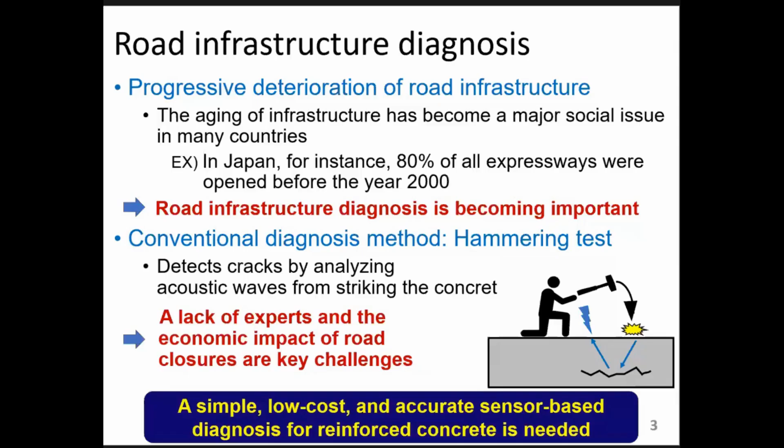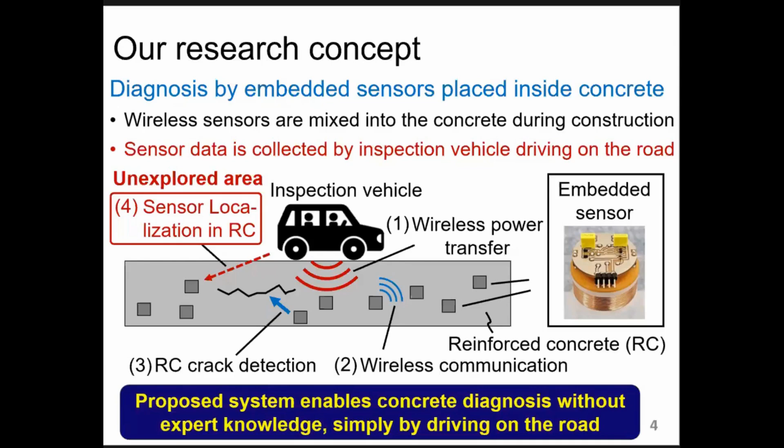The proposed system enables concrete diagnosis without expert knowledge simply by driving on the road. Among these key technologies, sensor localization in reinforced concrete is an unexplored area, so in this research we focus on it.

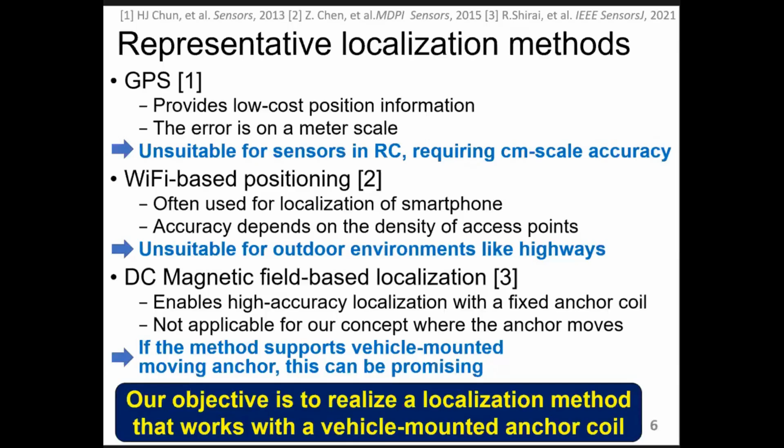On the other hand, DC magnetic field-based localization enables high accuracy localization with a fixed anchor coil. It's not applicable for our concept where the anchor coil moves. If the method supports a vehicle-mounted moving anchor coil, this can be promising. So our objective is to realize a localization method that works with a vehicle-mounted anchor coil.

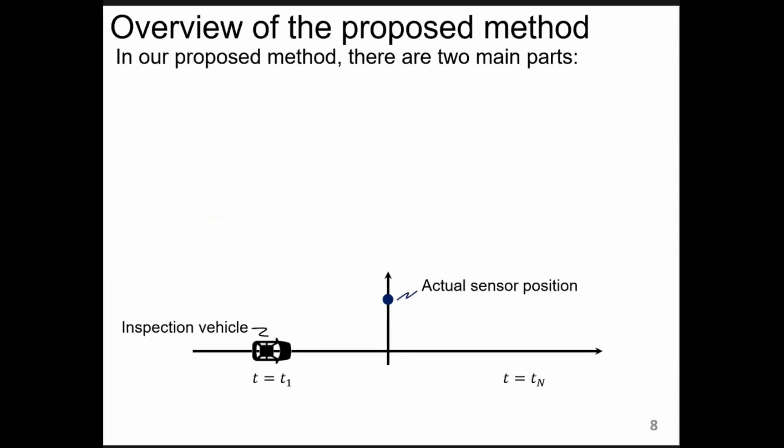Next is the proposed method. In our proposed method, there are 2 main parts. First, an inspection vehicle takes measurements at multiple locations to generate a series of position estimates.

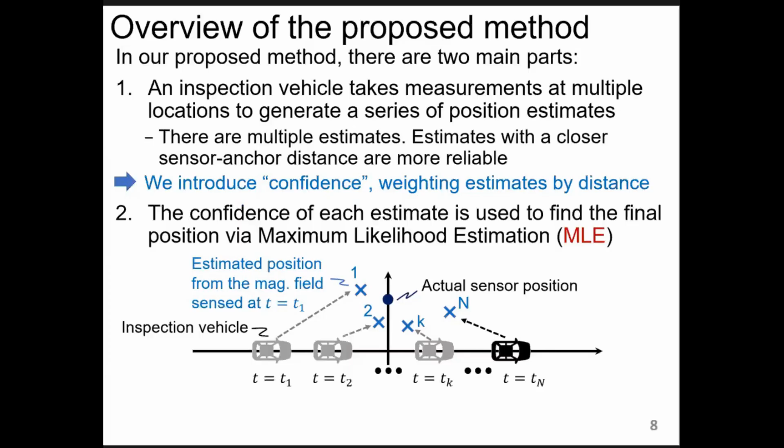There are multiple estimates. Estimates with a closer sensor-to-anchor distance are more reliable, so we introduce confidence weighting of estimates by distance. Second part is the confidence of each estimate is used to find the final position via maximum likelihood estimation. By conducting confidence weighting, we improve accuracy when the anchor coil moves.

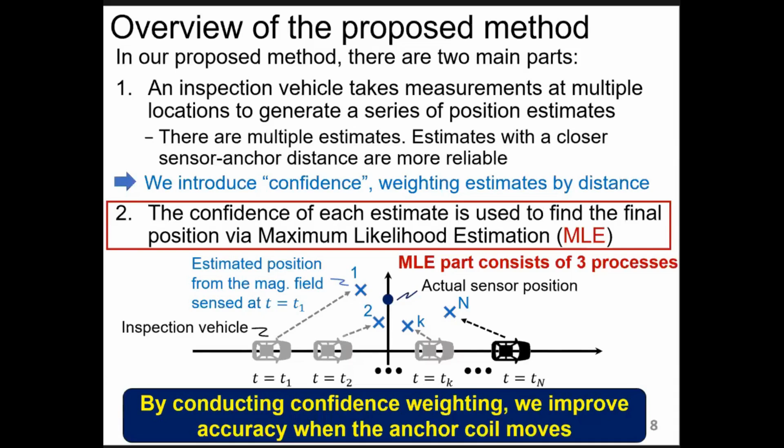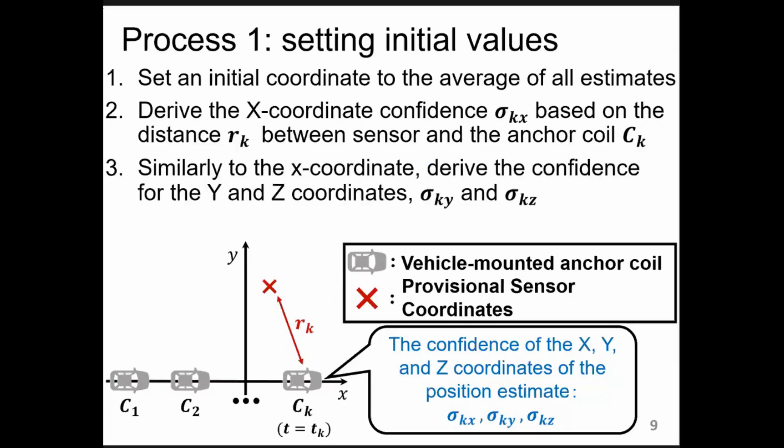Second step, we derive the x-coordinate confidence sigma kx based on the distance rk between the sensor and the anchor coil ck. Third step, similarly to the x-coordinate, we derive the confidence for the y and z coordinates, sigma ky and sigma kz. Fourth step, we repeat steps 1, 2, 3 for all anchor coils.

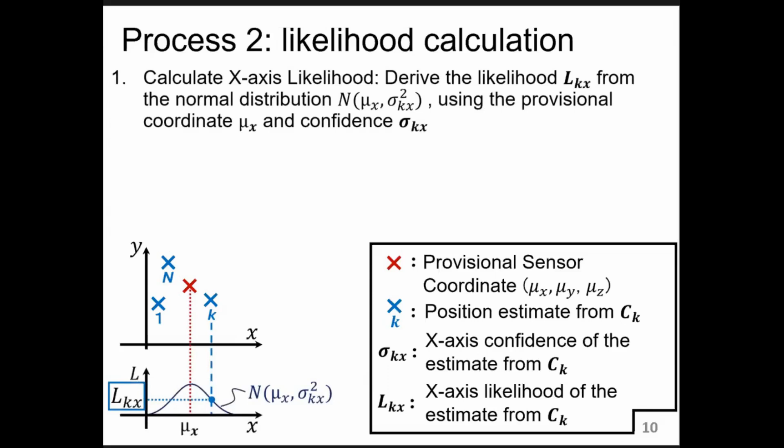Process 2 is likelihood calculation. First step, we calculate x-axis likelihood. We derive the likelihood LKX from the normal distribution using the provisional coordinates mu x and confidence sigma kx.

Second step, we repeat step 1 for other axes and multiply the results to find the total likelihood LK of the anchor coil CK. Third, we perform these calculations for every estimation result.

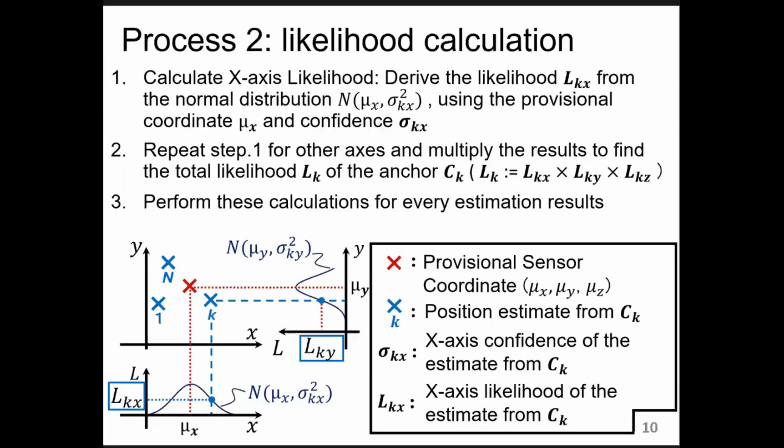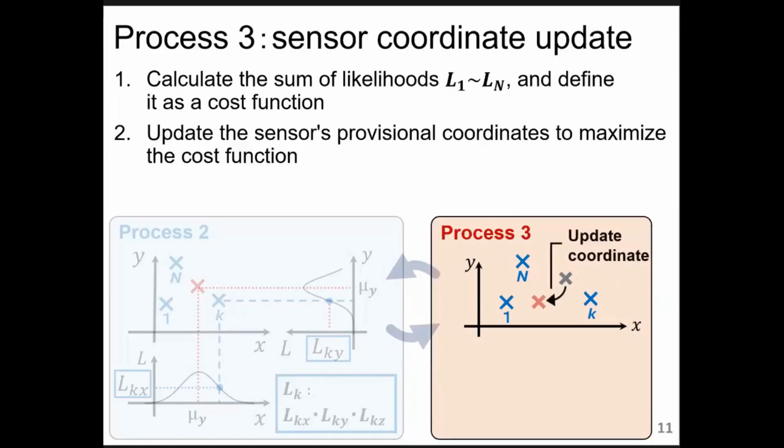Process 3 is sensor coordinate update. First step, we calculate the sum of likelihoods L1 to Ln and define it as a cost function. Second step, we update the sensor's provisional coordinate to maximize the cost function. Third step, we repeat processes 2 and 3 until the coordinates converge.

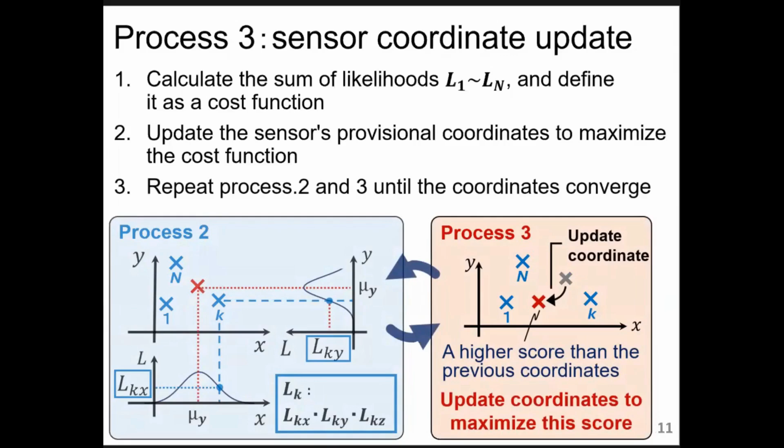Next is the experimental setup. We use the standard deviation of the estimation result as a confidence. Standard deviation changes based on the distance from the sensor to the anchor coil, so we pre-characterize the standard deviation with 1000 conventional estimates.

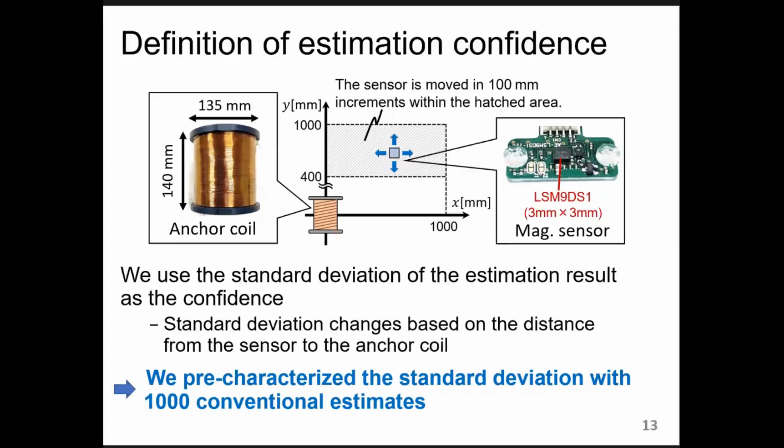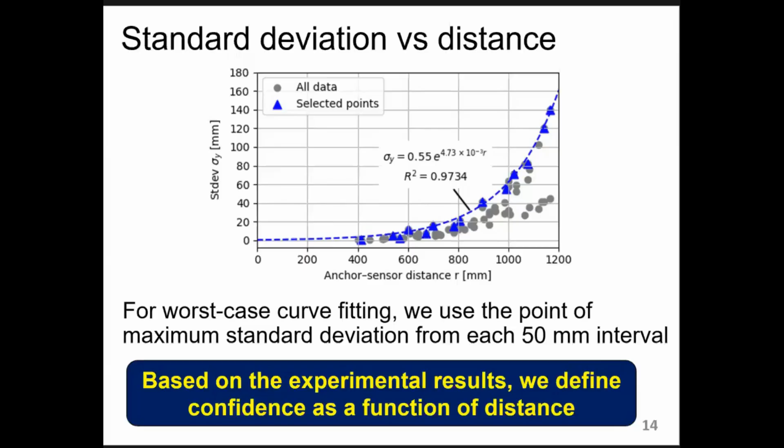This figure shows the standard deviation versus anchor coil to sensor distance. For worst case curve fitting, we use the point of maximal standard deviation from each 50 mm interval. Based on the experimental results, we define confidence as a function of distance.

This is the experiment of the proposed method. The sensor was placed at 0, 400 mm up to 0, 1000 mm. The inspection vehicle performs 11 position estimates, and this set of 11 estimates is a single dataset.

To validate the method, 1000 datasets were prepared. The subjects of comparison are the proposed method, the simple average of the 11 estimates, and the estimation result from the closest vehicle.

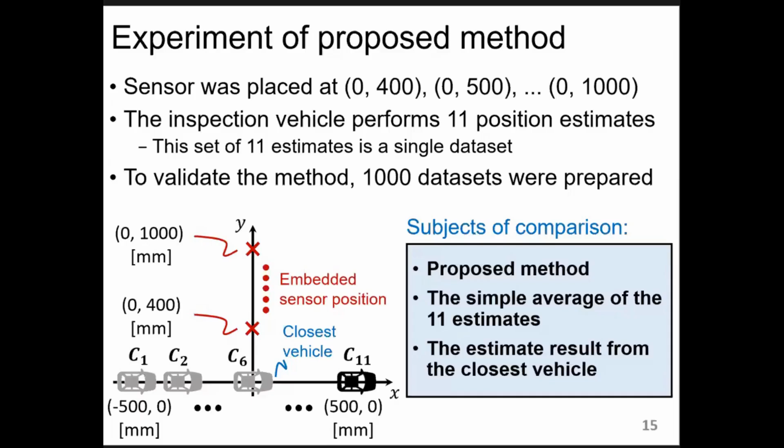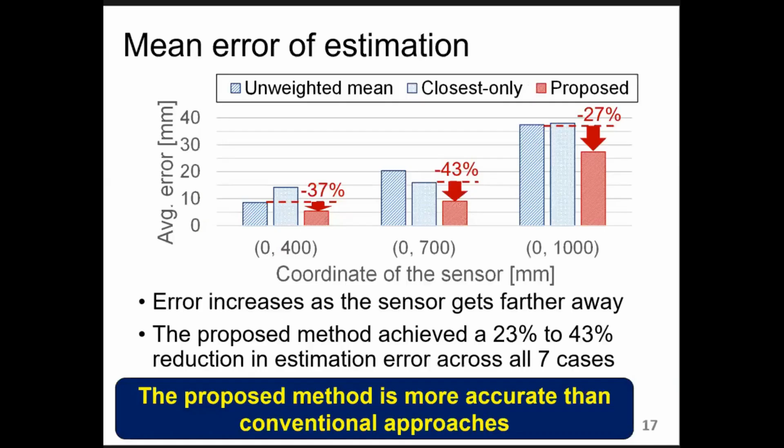Next is the evaluation. This figure shows the mean error of estimation. Error increases as the sensor gets farther away. The proposed method achieved a 23% to 43% reduction in estimation error across all 7 cases, so the proposed method is more accurate than conventional approaches.

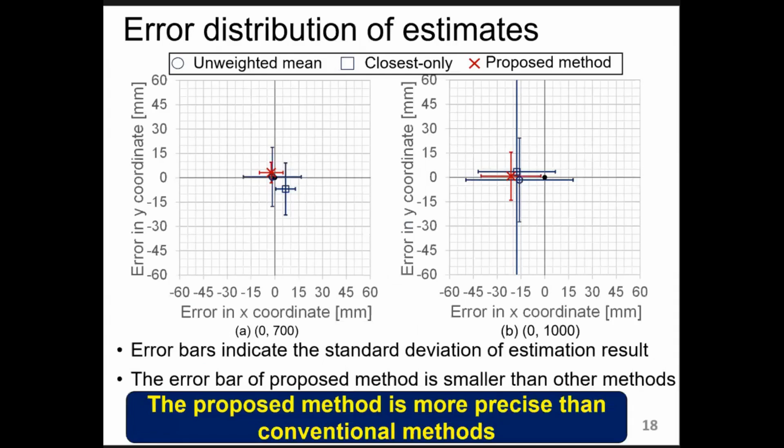Now I'll give the conclusion. We propose a platform that can diagnose reinforced concrete just by driving an inspection vehicle on the road. We propose a distance-based weighting method to allow positioning with a vehicle-mounted anchor coil. Our proposed method achieves higher accuracy and precision than conventional methods.

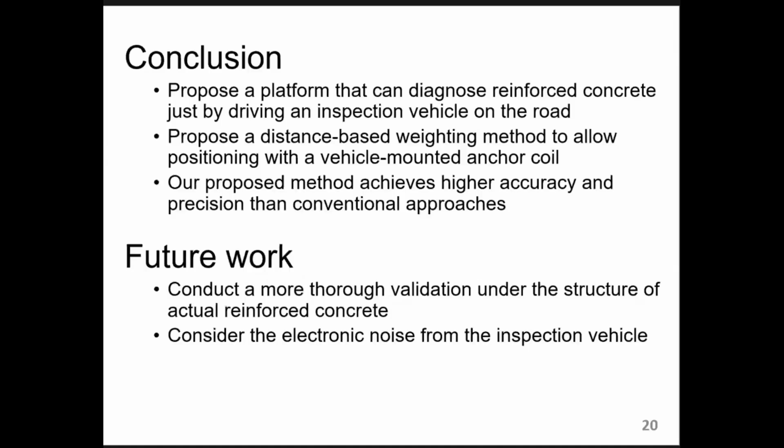In future work, we will conduct more thorough validation on the structure of actual reinforced concrete, and we have to consider the electronic noise from the inspection vehicle. That concludes my presentation. Thank you for listening.